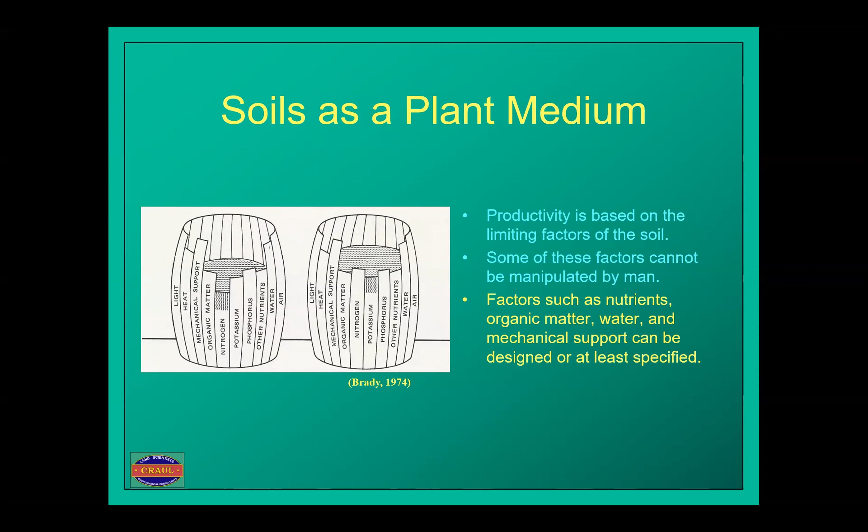The other item we may have too is that most times environmental factors may or may not be able to be changed. Now we can adjust them here and there, but they have a tendency to be something we've got to live with. It's like we can't really mess with Mother Nature very much.

So basically, if you're looking at the standard soils requirements for decent plant growth, you need to have some oxygen, a decent amount of pore space. Your bulk density needs to be under certain levels for clays and a little bit higher for sands. Generally, that works out to be about 1.5 grams per cubic centimeter for clays and about 1.75 grams per cubic centimeter for sands. That changes also with the particle size distribution of those sands as well.

So if you can get some penetration resistance and actually get some stuff to move, it kind of equates to roots elongating through the soil.

Then we have our soil pH, water content, cation exchange capacity, soil organic matter content in the surface. And I like to use soil organic matter content because that's typically the stuff that's derived from detritus and is gobbled up by our soil biology.

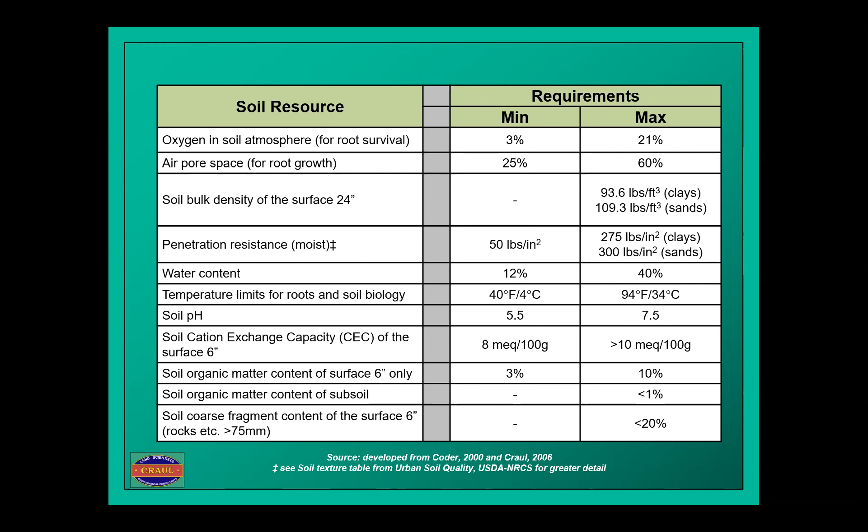So if we deal with our basic soils, there's multiple ways of handling soils, either using in situ soils or design soils. But we have soil density limitations that are sort of cut in stone, so to speak. So therefore, if you're a sand or a very coarse sand or loamy sand, your bulk density that really restricts root growth is about 1.8 grams per cubic centimeter, which works out to be about 112 pounds per cubic foot.

If you get into the stuff we'd typically like to use, loams and silt loams, the good stuff that most highly productive agricultural soils are made of, their bulk densities are actually quite a bit lower before they start reducing root growth. That's typically about 1.7, but you'll see some restricted root growth at about 1.6. Then if you're down into the sandy clays, silty clays, and fine sandy loams, that threshold is much, much lower.

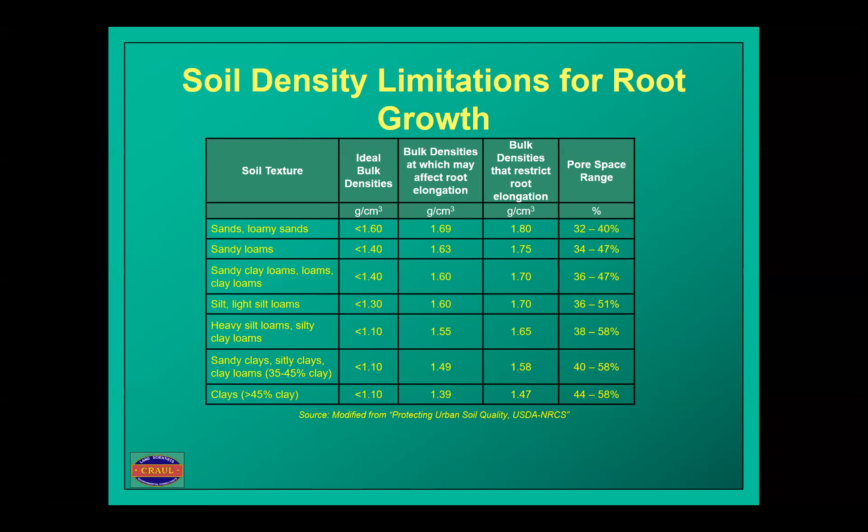If you look at it this way, typically we have an idealized bulk density of any soil texture where you have about 25% water, 25% air, about 5% organic matter, and the rest is mineral. That equates to basically a bulk density of about 1.33 grams per cubic centimeter.

If you get a well-graded soil at peak bulk density, at optimum moisture content, your bulk density kicks up to about 1.96 grams per cubic centimeter, or over 122 pounds per cubic foot dry. Roots cannot go through this type of material, it's just too dense. If you have a poorly graded soil at peak density, it becomes self-supporting, and even though you can really compact it, there's still an awful lot of air space left in it. So your maximum bulk density is about 1.7, or about 106 pounds per cubic foot.

This all comes down to the particle size distribution chart, because unlike soil texture, which is just a reading of the fine earth fraction of soils - the sand, silt, and clay - and does not include anything larger than 2 millimeters, only what's less than 2 millimeters, a particle size distribution chart requires looking at the whole soil, including gravels.

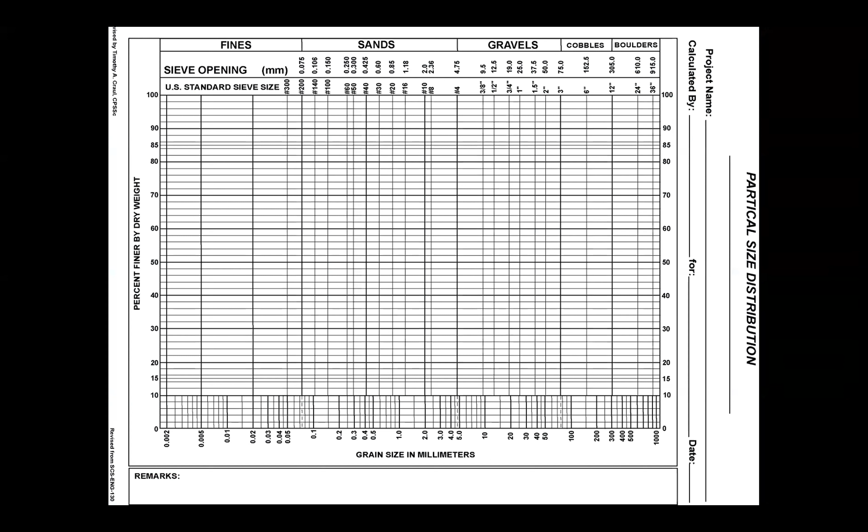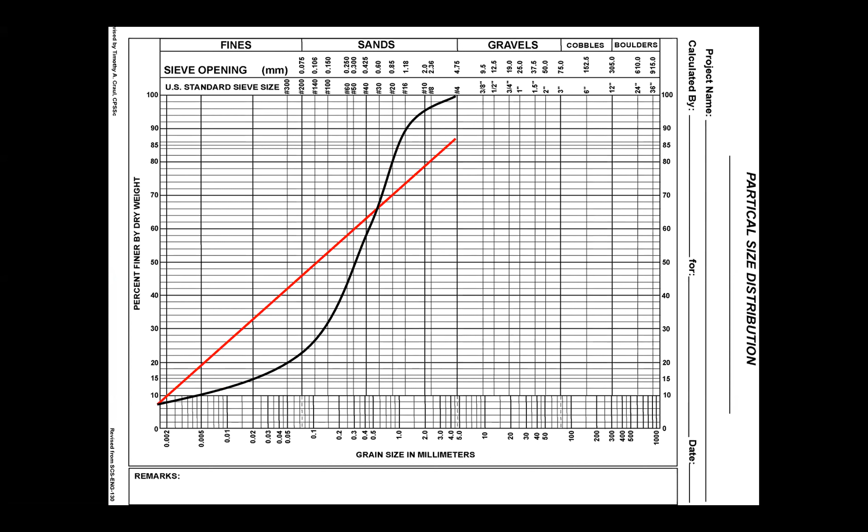If you look here, the first line we have across - the closer we get to a 45-degree angle on this chart, the more susceptible this soil is to compaction. So what we would try to do is find a soil that's poorly graded, which looks more like a sinus curve. In that vein, you have well-graded versus poorly graded soils leading to different results dealing with compaction. The poorly graded will have a greater chance of resisting compaction, where the well-graded would not.

Lo and behold, both these soils that you see on these curves are rated as a sandy loam. So if you look at this, they're both sandy loams, but they react very differently to pressure.

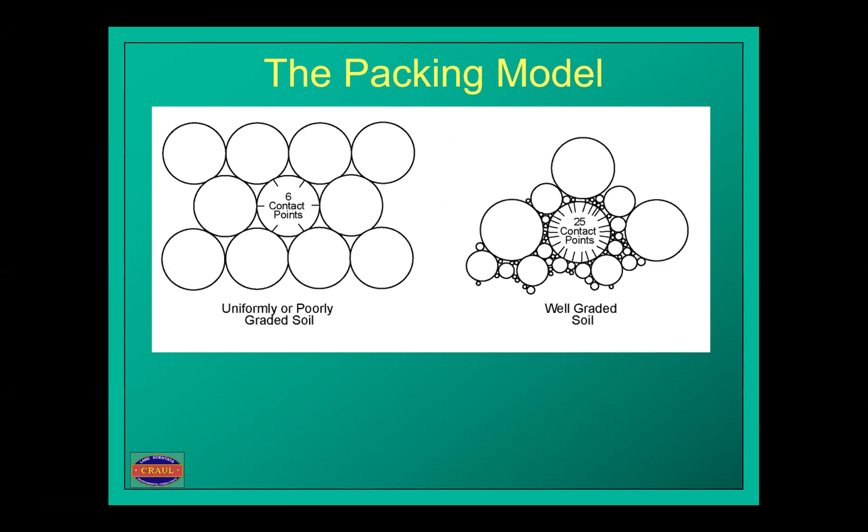If you look at it this way, in a standard packing model, your uniformly sorted or graded soils are basically about the number of contact points you get between your different particles. The higher the contact points, the more well-graded the soil becomes, and the more easily it gets compacted, just because you can fill in the little bits.

Therefore, not all soil textures are created equally.

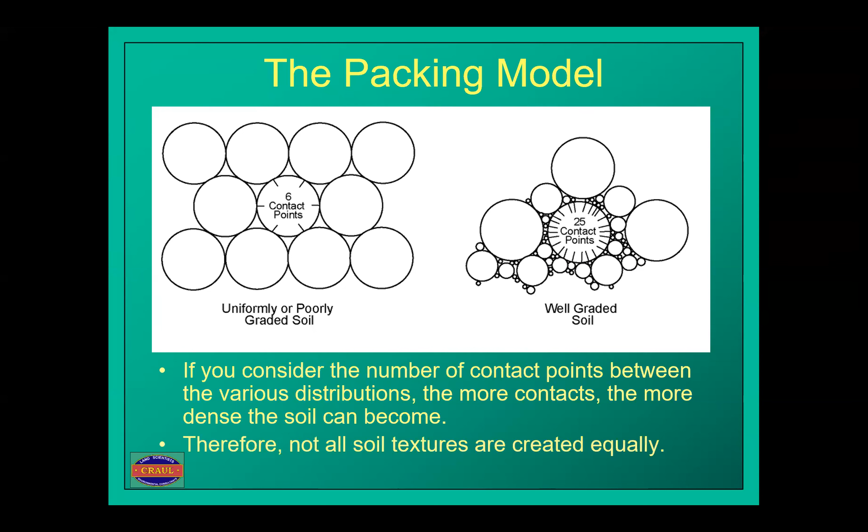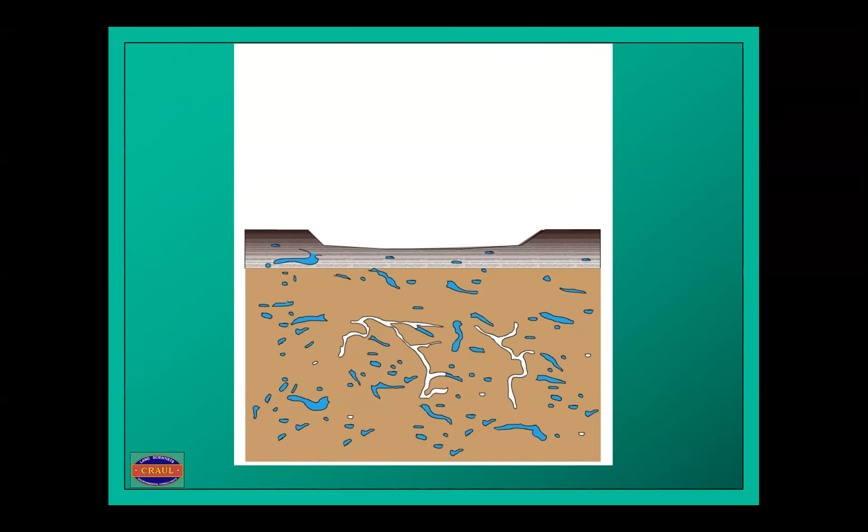Here's actually a CT scan of what I just talked about.

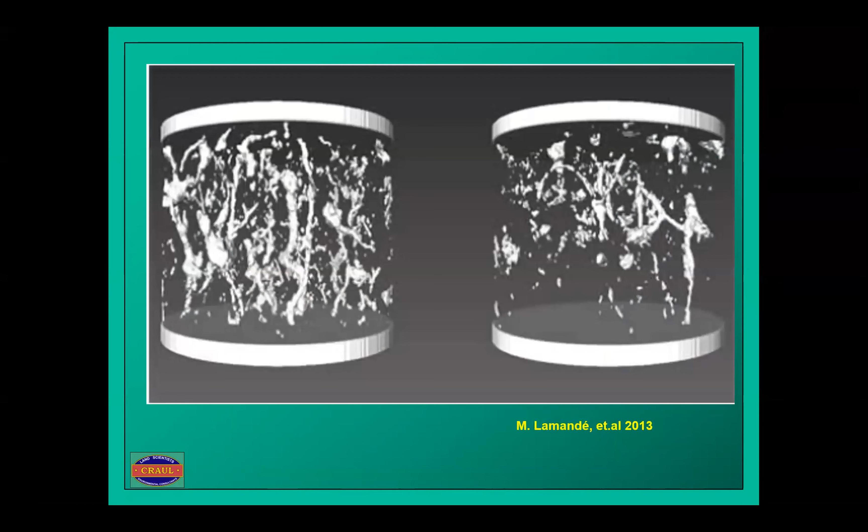If you cut down to the bottom part of these things - Jim Urban, who's speaking next week, found that basically 1,200 cubic feet is optimal for individual tree rooting volumes, according to some studies he did. He found that anywhere between 600 and 1,200 cubic feet rooting volume is typical for surviving urban trees. Of course, the differences then become tree species, environment, and soil properties.

Now, in my design scopes, I typically use an absolute minimum of 600 cubic feet per tree if you have a common rooting volume - meaning a linear trench where you're sticking a bunch of trees in it - and 800 cubic feet for individual tree plantings. This is the absolute minimum. I always ask for more. I pray, I beg, I get on my hands and knees and cry to the gods: give us, please, more rooting volume.

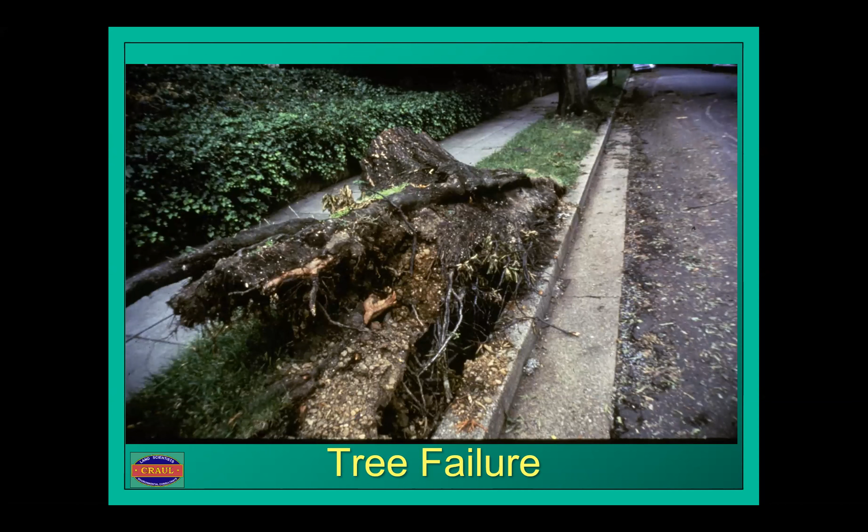So it's always better to have more rooting volume. If you don't have the rooting volume, typically what happens is you get tree failure. About 90% of the time, most trees fail due to rooting volume restrictions. But every once in a while, you get an infrastructure failure, where the tree actually decides it doesn't like being confined and goes where it wants to. So in this particular case, we have structure failure.

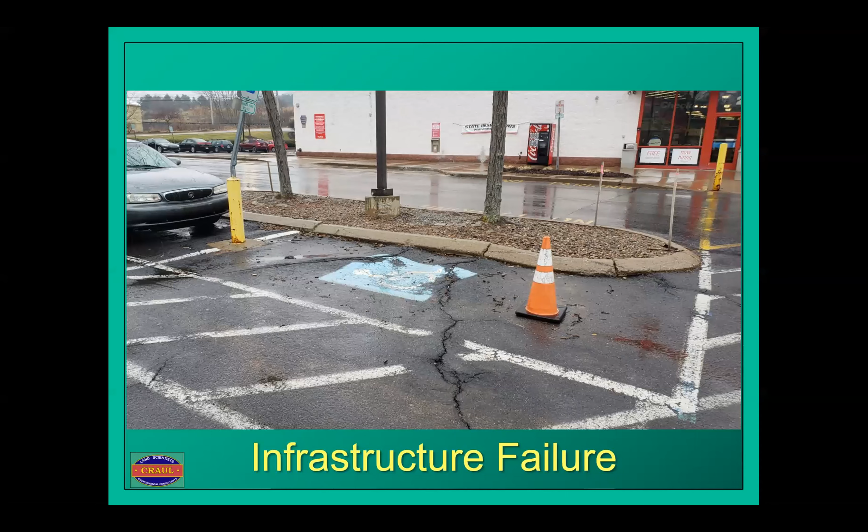Okay, now with all this soils data basically in the back of your mind, the tools and proper use are basically: try not to use a wrench as a hammer. It might work, but you may hurt your fingers.

So the tools, number one, be use of natural reference soils, i.e. soils that are in situ or something close by, screen topsoil from a construction site across town, soils that are currently on site that have been stored to one side, basically natural soils. Then we have structurally supported sidewalks and drives, the Cornell structured soil, sand-based structured soil. Now, all these different things are tools for your toolbox to pull out of, but they need to be used in the proper way. They can't just be thrown at everything and hope it'll stick.

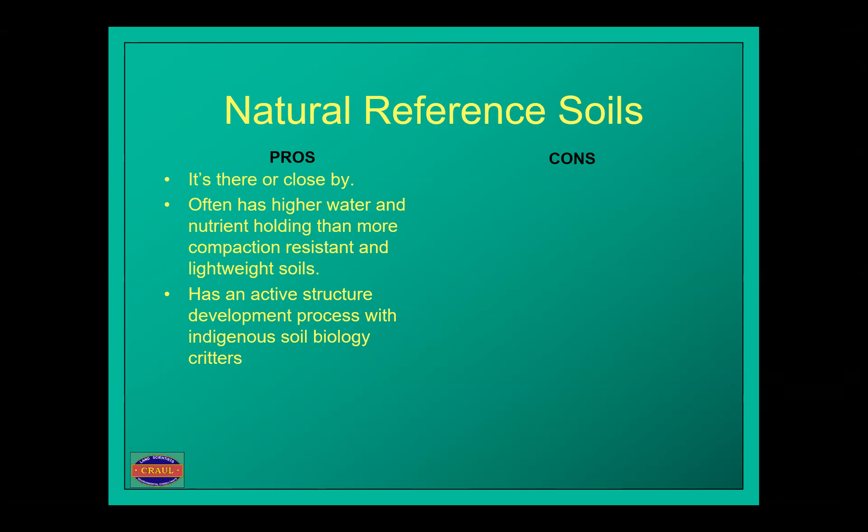So if we take a look at natural reference soils, the pros are they're usually close by. They typically have higher water and nutrient holding content than more compaction resistant or lightweight soils. They usually have an active structure development process with indigenous soil biology critters, so that they're already inoculated with the local good stuff. Generally, they have a higher productivity per unit unless they're degraded.

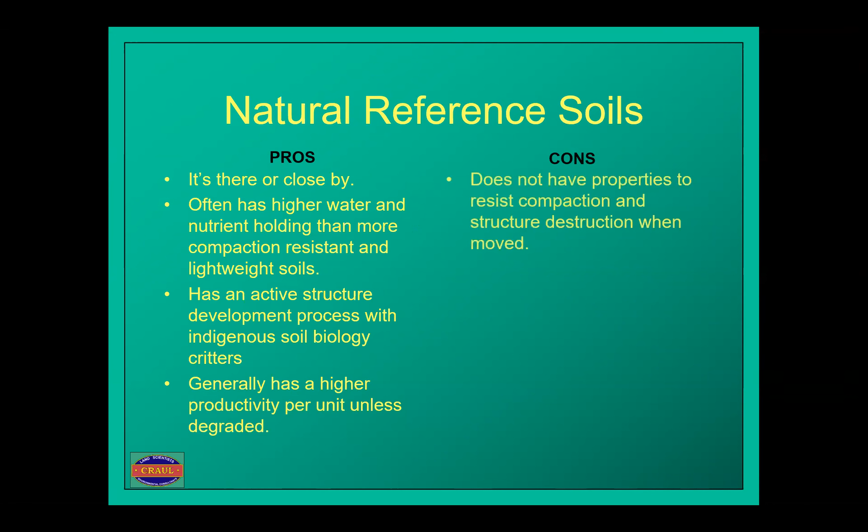The cons are they don't have the properties to resist the compaction or structure destruction when they're moved. In other words, they're also not homogeneous and they're easily degraded. They require a narrow moisture content range to work, and they're usually slow to dry out, which often delays installation.

So how many people on this call can raise their hands showing that the landscape was rushed to be put in, and they're installing it whether it's raining or not. If you have that problem, natural reference soils with a finer texture are probably not the best way to go. They may not be suitable to withstand the urban environment, with lots of people stomping across it, lots of events, heavy prescribed uses like concerts. So it would actually put a hurt on those soil properties, causing compaction, leading to remediation more times than not.

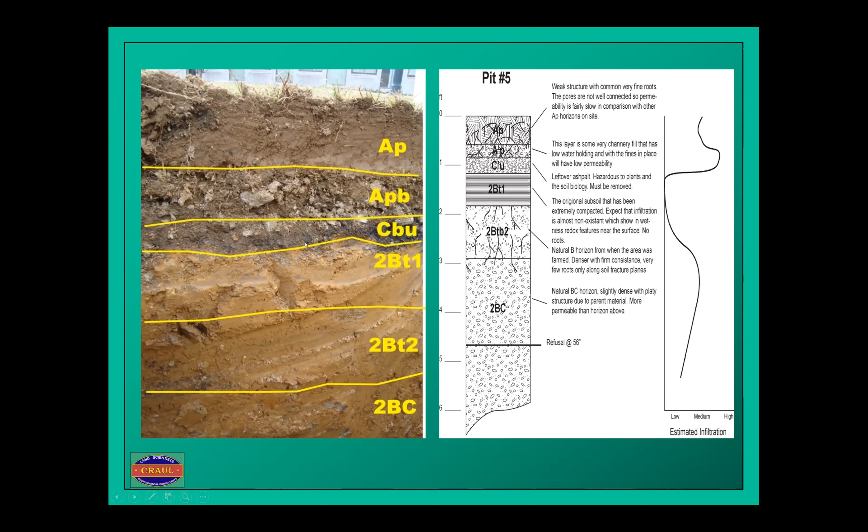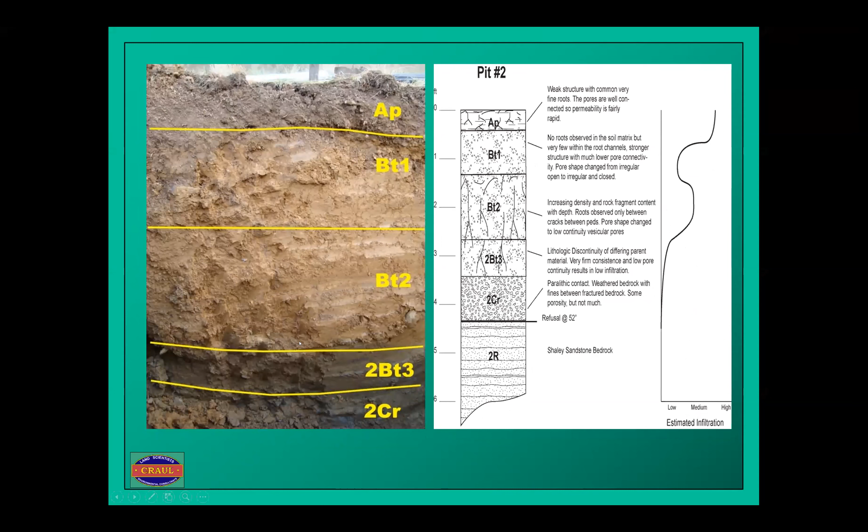If we take a look at structurally supported pavement, this is basically where we design some sort of mechanical means of supporting the pavement. This is either through Silva Cells, soil cells, or suspended pavements on some kind of cantilevered system, or piers with a matrix of stuff. The support of the pavement is separate from the planting soil structure. This allows you to use a more delicate planting soil that can hold more nutrients and water, reducing your water needs and increasing the productivity of your trees within that.

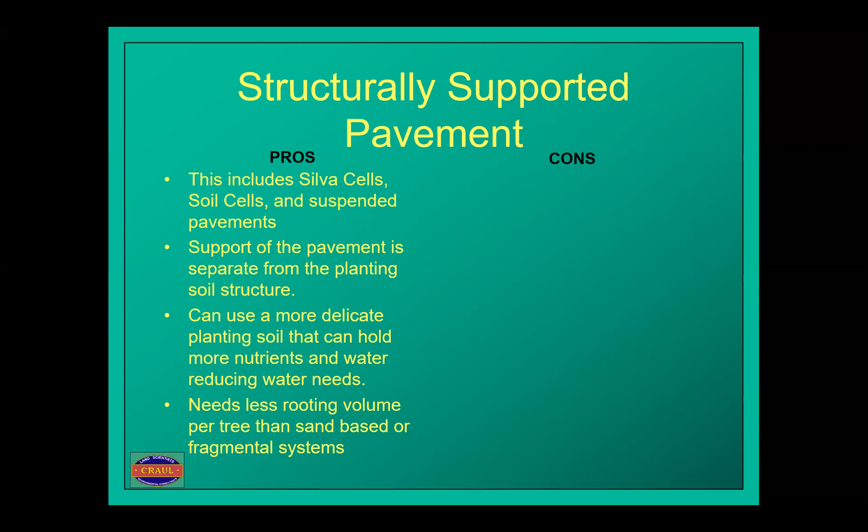It needs less rooting volume per tree than a sand-based or fragmental system because you are providing more water holding and more nutrient holding for those trees. However, these need to be used in specific conditions, or else some other things start to happen. It's pretty expensive per square foot to actually do this kind of construction.

Cell systems typically have difficulty fitting around underground utilities if the underground utilities are going kitty-corner to the layout of the cells. The other thing that also happens in high vibratory environments, i.e. next to heavily trafficked roads and streets where triaxles and heavy equipment are going, that vibration shoots out probably a good 100 feet from the drive itself that we need to adjust for.

With that high vibratory environment causing shaking of the soil, if you have a soil dealing strictly with structure at optimum moisture content, guess what happens to the macropores that are in there? They collapse, leading to subsidence and other issues, so you have a gap between your support and your pavement, which may not be able to support anything that drives on it.

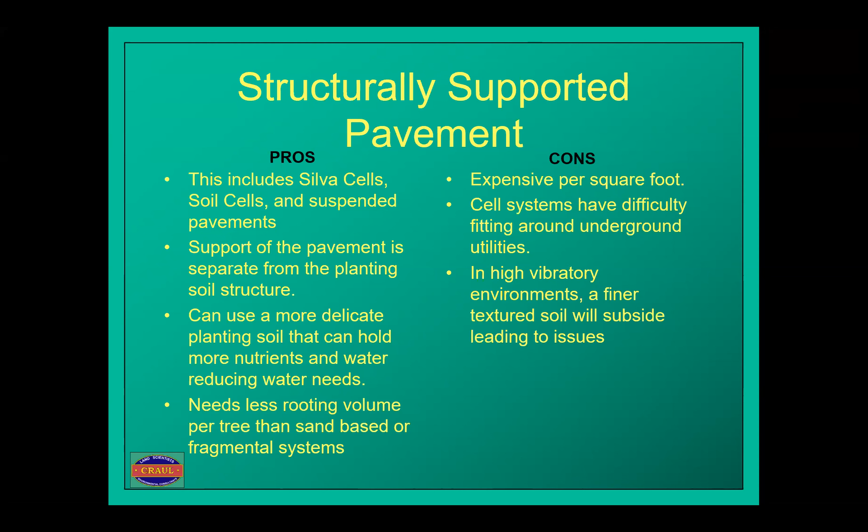This is actually a mechanical support system. This was used at Euclid Avenue in Cleveland, designed by Sasaki and Associates, a project I worked on. We put a sand-based soil in here because it was right along Euclid Avenue, a heavily trafficked area, with a tram that went down the middle of it. So we did use a sand-based type soil, but we did not have to compact it to 95% of standard Proctor. This was laid in at about 90%, just to ensure we filled all the spaces and didn't get too much subsidence. I haven't been back to check it, but I believe there's probably some subsidence in here, though maybe less than an inch.

Here's a Silva Cell section. We're doing this down in Philadelphia. The Silva Cells are actually placed over structure, above a parking garage. So this cantilevered concrete system is going to be subjected to some vibrations, and we were considerably worried about settlement of this material. So in this particular case, we're going with a soil that is resistant to compaction.

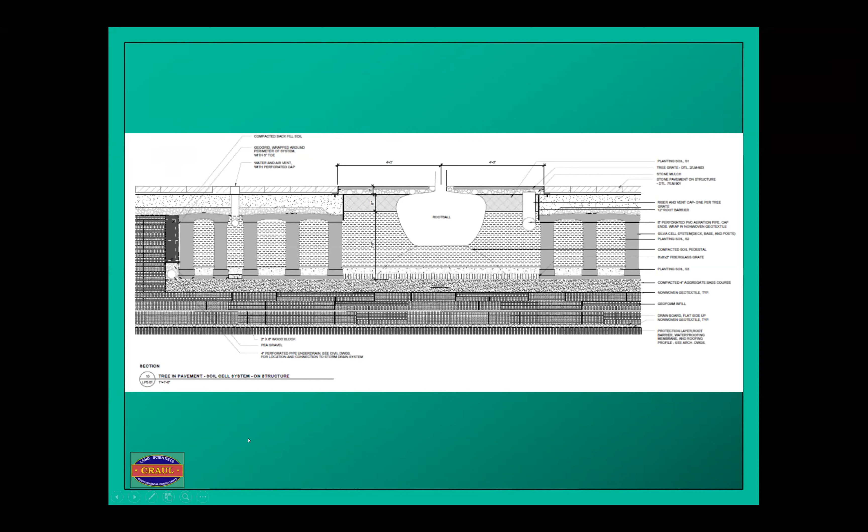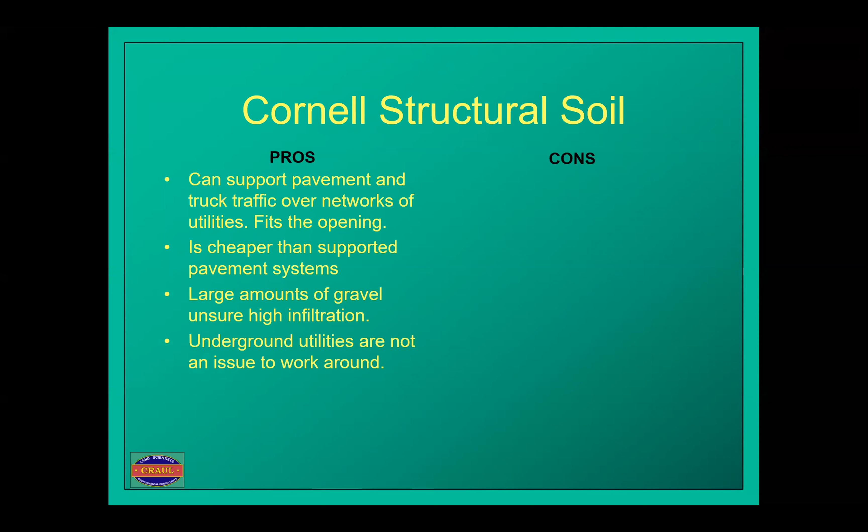The Cornell structural soil can support the pavement and truck traffic over networks of utilities, and it basically fits the opening. It's cheaper than supported pavement systems because we don't have to build anything, we just fill a hole. Large amounts of gravel ensure high infiltration. The underground utilities are not an issue to work around because you can fill in around them. However, the rigid matrix does not allow structurally sound framework roots.

The gravel used can also be detrimental to soil chemistry. If you use, say, a limestone or some kind of gravel that has a generally high pH, that could increase the pH much more within the system itself, and we'd have to offset it. The other possibility is you could get a gravel in there that's actually expanding gravel—once you add water to it, it has a tendency to lift. So you have to be careful about what gravel you use there.

The addition of hydrogels can also lead to a portion of moisture being retained and unavailable to plants. I've seen some newer hydrogels that have a tendency not to do that, but I'm not really sure which ones are where, and I'd be a little careful about putting too much hydrogel in a system.

Lastly, according to the Cornell recommendations, you need to find a silty clay loam to use for the mix, and it's very difficult to find a good upland silty clay loam in a lot of places. So that may be detrimental. You may have to go with something coarser textured anyway.

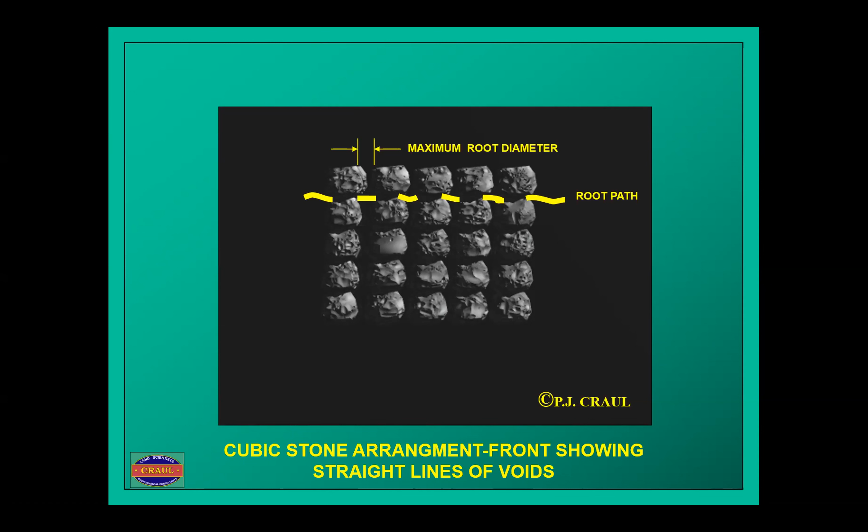The main reason I was talking about this is that the stone itself, if it falls into a cubic stone arrangement, you can actually get a straight line void so that roots can go straight through it. But typically that doesn't usually happen. You usually get a tetrahedral packing, which causes the root path to undulate rather than go in a straight line.

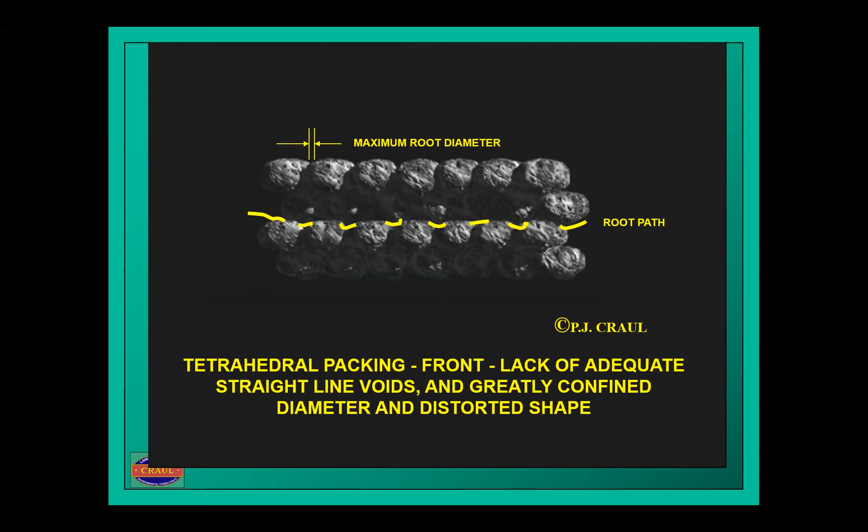This pertains to the framework roots themselves. Framework roots develop their own cross sections to be able to structurally support the tree. I believe Cornell looks at roots of this size, which I like to call slinky roots. For fine root hairs and small roots, this system is not a detriment. But for framework roots close to the tree that have to be structurally sound to support the tree crown, you need a clear way for those roots to generate their structural soundness, and a rigid stone matrix doesn't allow that.

If I'm correct, I believe Cornell now states that this stuff has to be used out away from the main tree root, away from the tree trunk itself. I don't know the definite spec, I'd have to look it up again, but that's the last I read.

Now, I wouldn't rely on these numbers too much because the Saxton and Rawls equations were generated by fitting curves around data, and a majority of that data was in the center portion of the texture triangle. So as you get towards the outside edges of the texture triangle, the fitting equations have a tendency to go kittywampus on us. We need more data to plug in there to confirm that's actually happening or not, but at least it makes logical sense.

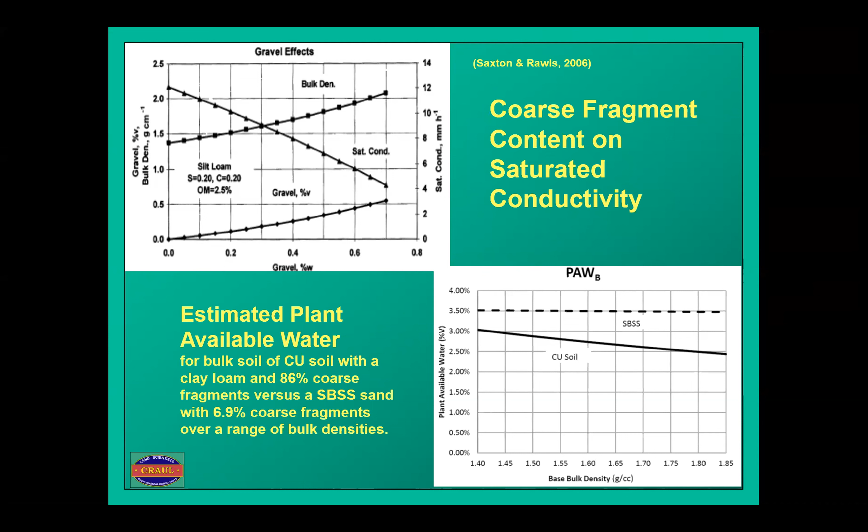So for sand-based structural soils, the pros: it can support pavement just like the Cornell structured soil, fits the opening. It's cheaper than supported pavement systems and the Cornell system because we don't have to mix up anything special, we just find some good sand someplace, although that sand needs to be relatively good. The materials are more readily available, and it resists vibratory compaction from adjacent traffic.

It can also act as a green infrastructure system. If we have something that infiltrates a lot of water, we can run a lot of water through it, which would then filter that water. By the time it gets to the bottom, we can say we've filtered it and it has helped with the quality of that water going out.

The cons are low moisture and nutrient holding capacity. These sand-based structural soils are droughty, and they also have low nutrient holding capacity. But we can tweak this with organic matter content, addition of biochar, and a few other things.

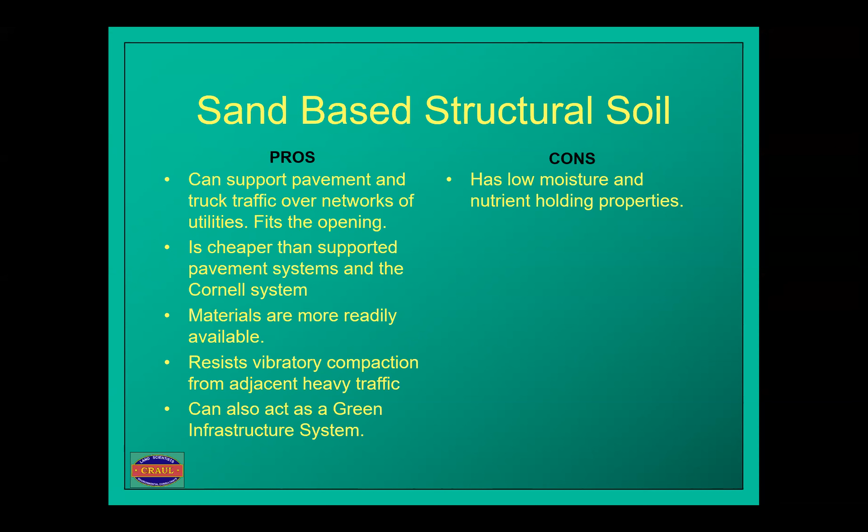The particle size distribution of sand required to obtain compaction resistance is fairly tight, and not all sands work well here. If we get a sand with a high amount of calcium carbonate in it, it will tend to gel and actually cement the sand particles together, which might as well be almost concrete anyway. Freshly mined natural sand can also cause this cementing, and it has a propensity for high pH content.

Until we get some nice rainfall events running through the system, that pH is going to stay high. Now, with the pavement system around it, if we have concrete, there's a problem of runoff from the concrete being very high in pH, and we can get soils underneath concrete sidewalks to be fairly high as well. That's true with all systems here.

The thing with sand-based structural soils is that since it's a coarser material, it has a tendency to flush more readily than a soil using a finer texture.

Good medium sand is also difficult to find in areas that are supplying for fracking. Try to find decent sand in Chicago - most of that stuff has been shipped out west to North Dakota for fracking. It's hard to find decent, good medium sand in Chicago.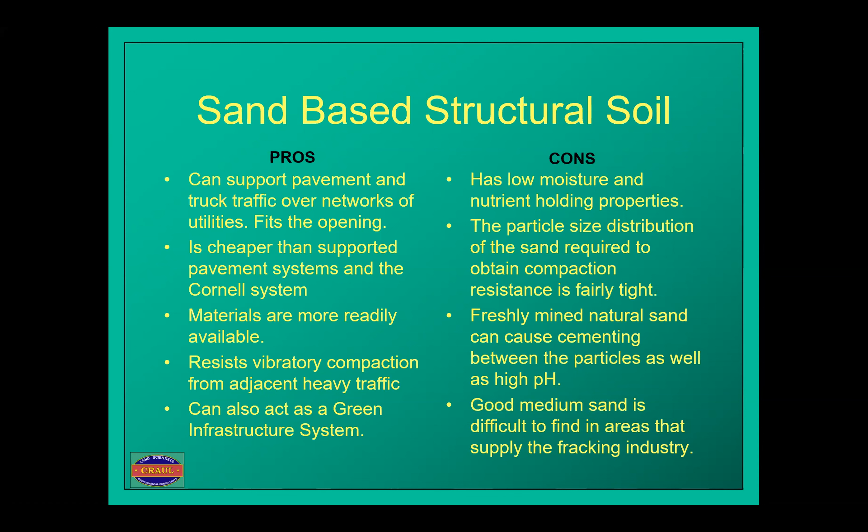Okay, looking at the Proctor compaction, if you take a look at A and B here, they are well-graded particle size distributions, and their Proctor densities are very high. Notice that the dry density in grams per cubic centimeter is well above anything that a root could actually penetrate.

D and C are poorly graded particle sizes with significant amounts of sand-sized particles. If you look at the moisture contents in these red bars, it doesn't take a lot of moisture for those finer-textured A and B soils to meet their optimum compaction, whereas the moisture content for the sands is actually a lot higher. So therefore, in reaching optimum density, we're allowed a little more wiggle room during the installation process.

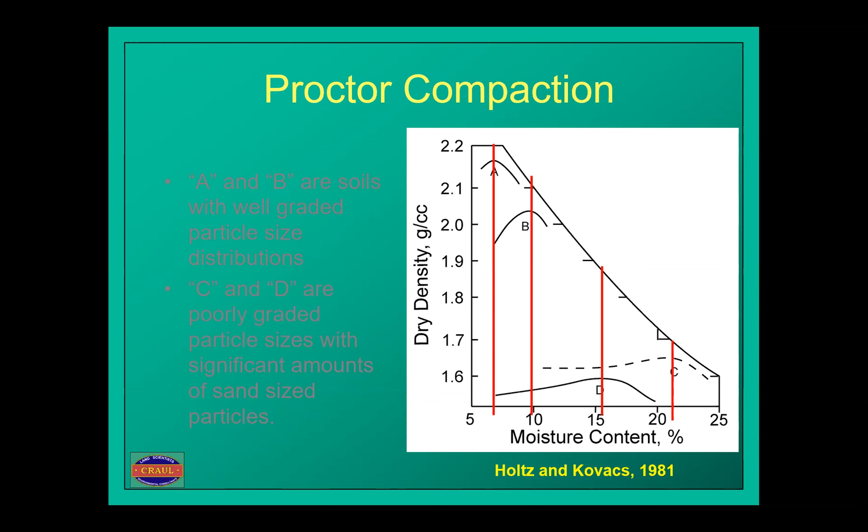Now, the other thing we can also deal with is we'd like to see a system of pervious paving in between the trees to allow for flow into them to offset the droughtiness. The other thing it also does is if there's any kind of detritus on the sidewalk, fine organics or whatever, that will also get into the system and feed the roots.

But it also has contaminants that would possibly cause problems for those as well. Hopefully we can get a flushing from that system to make sure it doesn't overflow and override the trees to the point where we get failure.

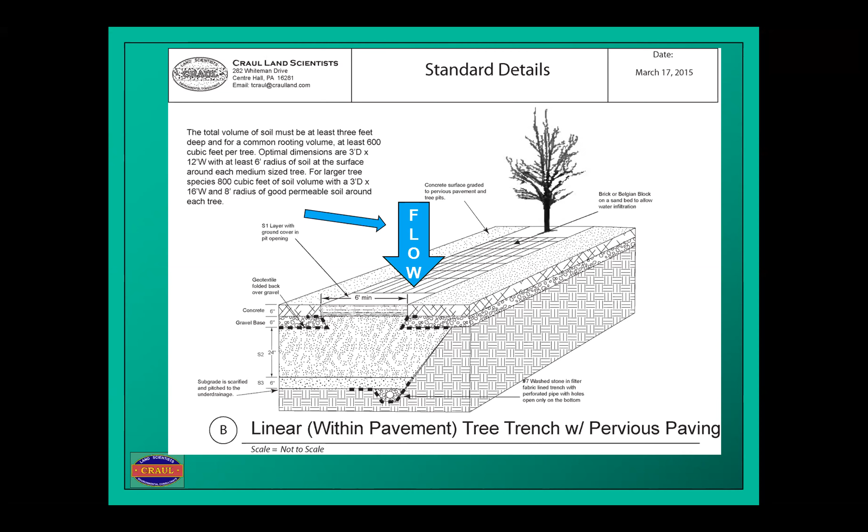Okay, this will give you an idea of what it looks like during installation. As soon as I see an installation of the Silva Cells, I'll have photos of that. Right now, at Shoemaker Green at University of Pennsylvania, this is the sand-based soils going in. This is the gravel being applied on top of the geotextile, before and after the compaction is done. These are the trees being put in, and the geotextile is pulled back away from those trees. They put gravel back in, and finally, this is the pervious paving going in.

And finally, the last thing I want to touch on: if we ignore the proper use of soils and the proper locations for using the tools in our toolbox, we could have some failure issues. So don't take the idea that we can save 700 dollars by not taking soil tests.

Okay, that's everything that I have right now.

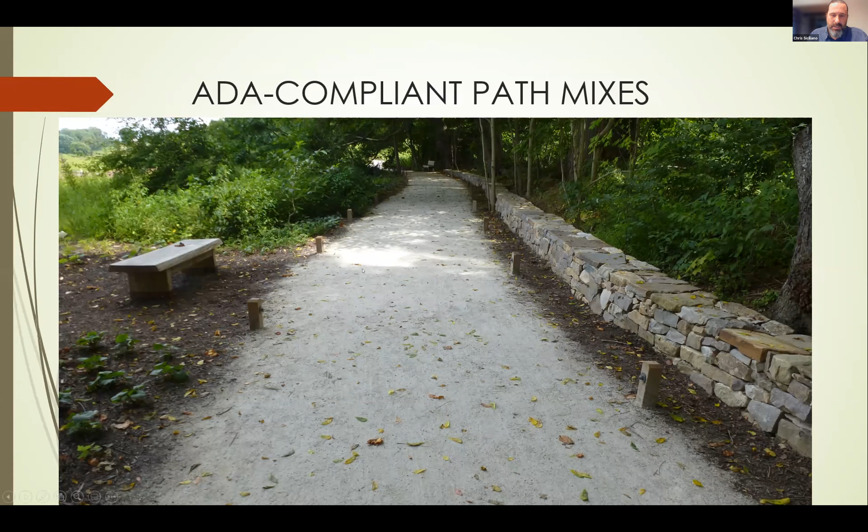Our custom blending—just to kind of give you an idea of what we were doing—this was a project that was out in Louisville, Kentucky. They had a washout, I believe, back in 2017. The river flooded and took out a huge amount of this.

Really, this is just a public space. It's an art scene. They did a wonderful job. If you haven't been there, it's worth stopping out, turning the areas around the highway and under the highway into basically parks, festivals, things like that.

And so we had this material get driven on quite often. We had to do color match. There were certainly a lot of blenders that were a lot closer, but we had the experience. And I think at the end of the day, everybody was really happy with what ended up happening.

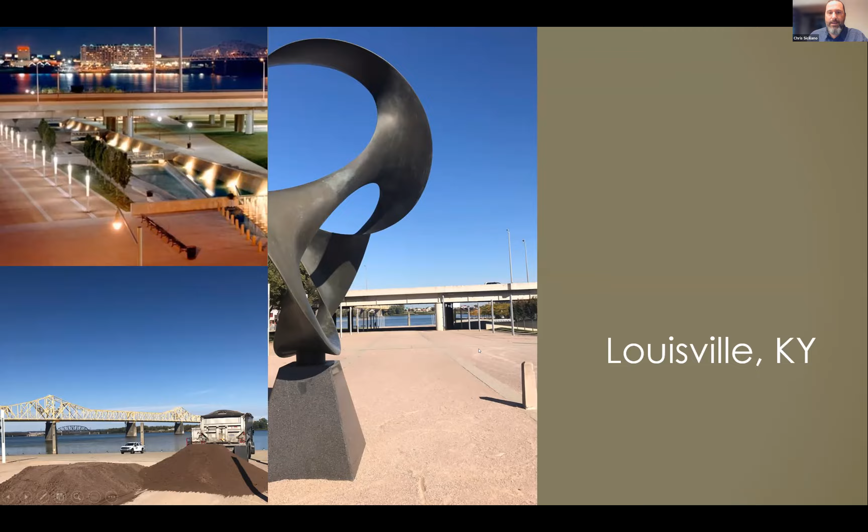Here we are in DC, the National Mall. These are the walking paths on the mall. This was a 5-component blend. This even kind of pushed our limits a bit—being able to keep this job on target and moving, but to keep it consistent.

So this is a material where you really want to have a very good qualified blender, because you've got to have something on this scale where it's going to be—I have to match up the soils from day 1 to day 30 as it's wrapping around. So when these guys come back 3 weeks later and you're butting up, it's got to be a spot-on match.

We also did the soils as well on the mall. The first half, this half that you're looking at, was 2012. The back half was 2016. And this was just a great project to just throw in.

Facescape is an artist's rendition—it's what America looks like. It's kind of the average. They took about, I think it was like 30 photographs and overlapped them.

And we were really just brought in—they were kind of at a standstill, and we were brought in as a consultant on it just to help. It's 6 acres. And so anyway, the picture on the left was under construction. And if you actually look under the lip, there's 2 people there with fluorescent vests on, just to give you a sense of size.

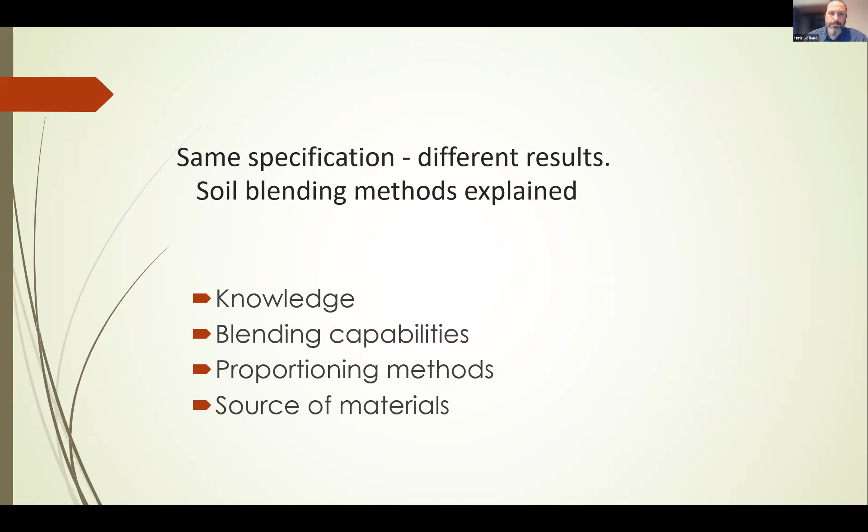So this is a loader, as we all know. The most common blending method is pad blending, either on asphalt or concrete. Typically what they do is have a formula which tells the driver to pick 2 scoops of that, half a scoop of that, another scoop of that, put it into a pile, scoop it, lift it, drop it, and back drag it out and do it. Now I want to be clear, this can work—it's a reasonable way of doing things. I don't expect people to have invested the way we did, and it can work, but you can also see this as an opportunity for human error.

If a project is being rushed, there's moisture content—yes, there are scales on these things, but there's also moisture content differences, so things are going to weigh different weights on different days. This just could be a potential issue. What you're going to get from that is inaccurate proportioning, inconsistent mixing, especially if it's wet. It can be prone to contamination, though that doesn't seem to be as big an issue, but it's something to be aware of. You get inconsistent results—if you're testing this, and it's not being mixed or proportioned correctly, you could get inconsistent results from it—and it's time consuming.

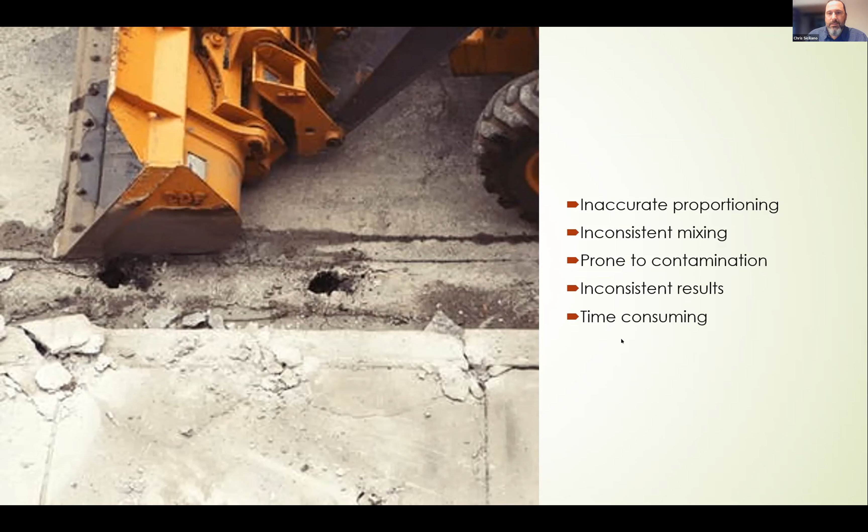Okay, this is our blending plant—kind of the opposite end of the spectrum. I'm going to walk you through it. First, we're going to focus on the proportioning system—that's all this thing does is proportion, like we're mixing paint. On the left, you'll see we've got the loader, and that's most of the materials—it's going to be aggregates, compost, sand. Any of those things go into this blending plant.

The super sack material also goes in, and that's going to be anything like materials, organics being shipped from farther away, like rice hulls, something like that. It could be vermiculite, perlite, something that's really light and could blow away, and it's usually to protect from the weather. And then anything else that they let me put in the bins there.

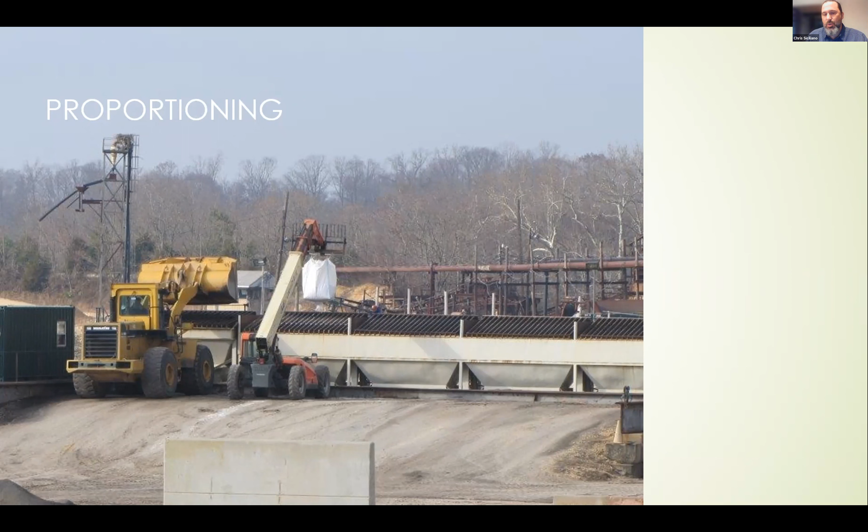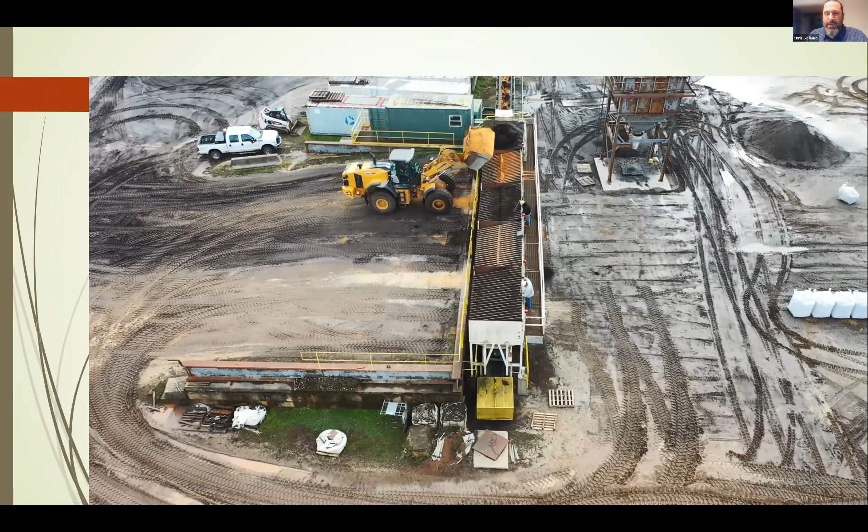On the left, the picture is just showing you go to the blending plant, and then on the right it comes out—hopefully you can see this. So here we are loading it. Happened to be a rainy day, but that's the day we got the guy with the drone. Material, consistent pattern all the way up, down through the blending plant, shoots off to the right there, and as you look, every bit of it is consistent coming out.

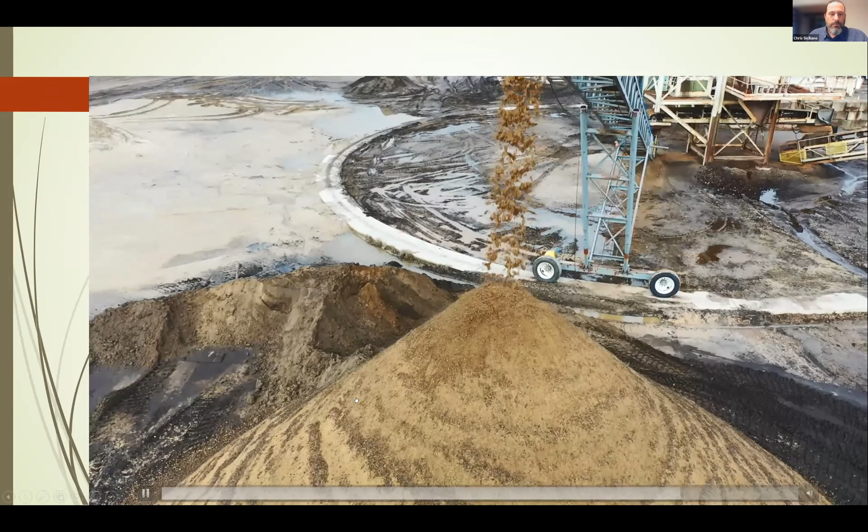Okay, so some of the results of poorly designed soil.

Short term is mostly focused on, a lot of this is based on green roof materials, it's 90% of what we send up to New York. So the short term, sedum mostly are going to be affected by this. Other plants are probably going to be happier with it, higher organics and a higher moisture content, but a higher

organic mix is going to have a greater level of compaction. Drives up the cost because you need to bring in more material. It would be a cubic yard, but then if it's going to compact 20%, you need to order extra.

You get stunted growth, especially with sedum. They don't want their feet wet, and it can delay the root establishment. And so that just leads to higher maintenance costs. You're getting more weed seed establishing. But that's what happens if it's sedum.

Now here we're looking at this, the long term is a loss of volume, and this is really our concern. Once you lose volume, you do get some root exposure. That's not the end of the world, but it's the diminished permeability. That's really when your performance is really going to start to suffer.

So all materials are made up of organic and mineral. And when that organic breaks down, the organic is taken up, but the mineral portion stays behind in the forms of sand, silts, and clays and clogs up void spaces. And so where you had a very well draining system 2 years ago, you no longer do. And once the fines are in, you can't remove the fines. So it's one of those things where you get what you pay for.

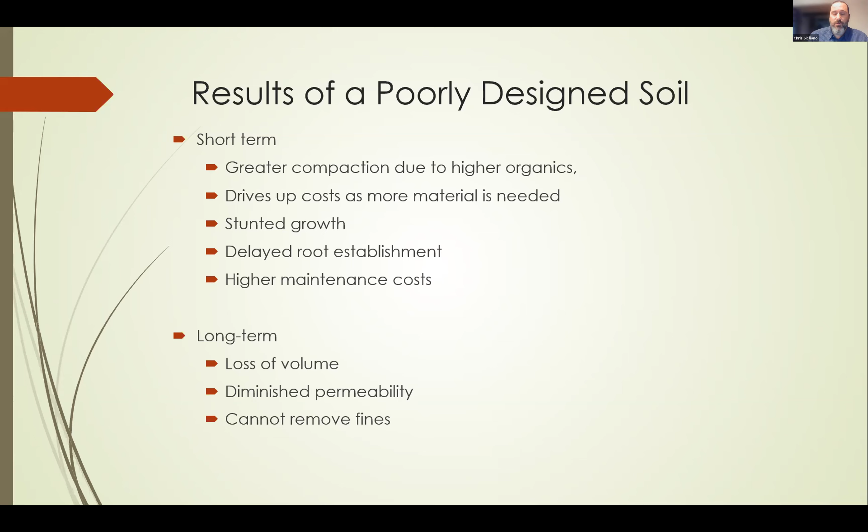So I've renamed this one, I don't know how many times. It's not really cause for concern, it's just things to consider as you're going through and some things to pay attention to.

Test data, and I am pretty serious about this one. We test every 6 months. Now that said, we're probably at 6 months right now, we don't have anything back, so we're at 7 months, but certainly nothing more than like a year. People should be monitoring at least that long. I've seen all sorts of stuff be submitted where it's been a lot less or a lot longer than that.

Now, we do so much custom blending that I have dozens of formulas. I can't possibly send them every year, but if there was something you were interested in, I could bring something up and we could retest.

Ignore the marketing and focus on the testing. There are some great designs, there's great concepts, I don't know that I agree with all of the end results of them. It's just kind of packaging. Focus on the test results.

If there's systems that they're telling you to use and they're telling you all the components, at the same time focus and say, well, should I really have that much organic in a mix? Or should my drain rate really be there? And those are things to consider.

Beneficial reuse and sustainable materials. We definitely use, we have beneficial reuse materials, sustainable materials, we do, if they work. Priority one on any job is, does the material work? Does it fit with the mix? And just because, and we all kind of like those terms, it's always exciting to say that, oh, there's a beneficial reused material in there at 20, 30, 40%. But there's a lot on the market that probably shouldn't be going into a green roof or other mixes.

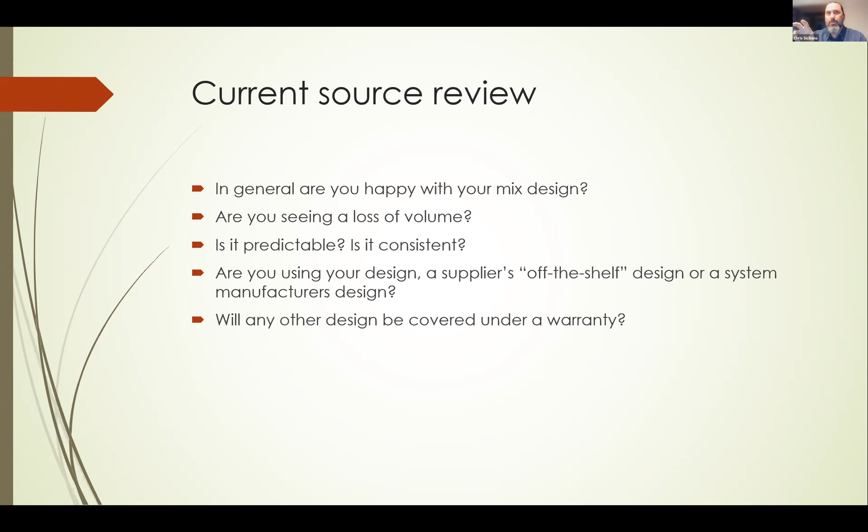Are you using your design? Is it your mix? Is it a supplier's off-the-shelf mix that you're adopting? Or is it a system manufacturer's design? And if it is, is it under warranty? So those are all things to consider. If you're using a whole warranted system, you couldn't swap out the organics without their buy-in.

Our design method boils down to this: we do not write specifications that steer you to Stancills. We write them to raise the profile of the industry, and that's always been very important to us. There are specifications out there where people have asked, we really want to make sure your Sky Garden gets on this project. Well, if it's an or-equal and it's an equal product, there's not a lot we can do about it. We have some basic design principles we've developed over the years, lots of trial and error, lots of testing, and we pretty much stick with those parameters in our designs. So as long as we're sticking within that range on a design, we should be successful. Haven't had problems yet.

Sorry, but the physical and chemical characteristics - when you're talking with your blender about changing things up, they really have to know their physical and chemical characteristics really well, because they're going to overlap and interplay. And unless you have a really good understanding of what the outcomes are, you can have results you're probably not anticipating. So if you wanted to make something lighter weight, and you're going to pull out, or if you wanted to remove some lightweight aggregate, they should be able to tell you the 10 things that are going to happen from that.

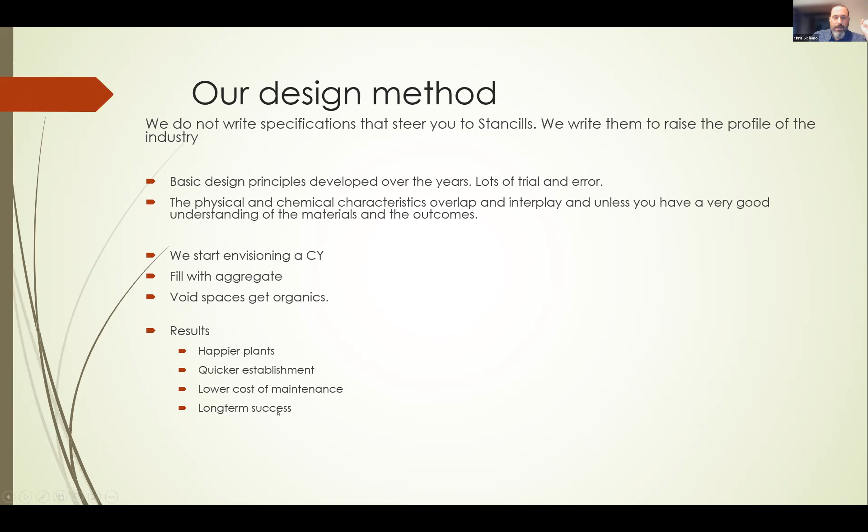So when you're specifying, a couple things to consider. You may have a great compost source, and if so, just check to see what it is and see what their latest testing is. Make sure the pH is where you're looking for it to be.

You could request a minimum amount of aggregates in there. As for the source of aggregates, while they're not all equal, they all have advantages and disadvantages. I don't know that I would specify one or the other. You've got two good sources up in New York, so you should be fine.

Warrantying against a loss or compaction is something we had talked about—guaranteeing that if there was a loss, they would make up for it.

I think accepting the 'or equal' tends to be a big concern a lot of times. I hope that you guys get to work on jobs where you actually do get to enforce the 'or equal.'

You want to be looking at higher pHs, that could be a thing. If it's a lower drainage rate, it's probably only going to get slower as the materials start decomposing and weights change.

Although I just spent a whole time going over the blending systems, I don't recommend specifying specific or eliminating certain blending systems. I think what makes this industry great is that we went through the innovative period and we're more into almost like the economic period right now, of how to make it cheaper. I'd like to get back more to the innovative. I think you can get some people with great, wonderful ideas, and I'd really like them to be out there. I don't expect them to have the equipment and materials that we have to be able to do it, so in order to push it forth, I think it's good just to make sure they're doing a quality job at that.

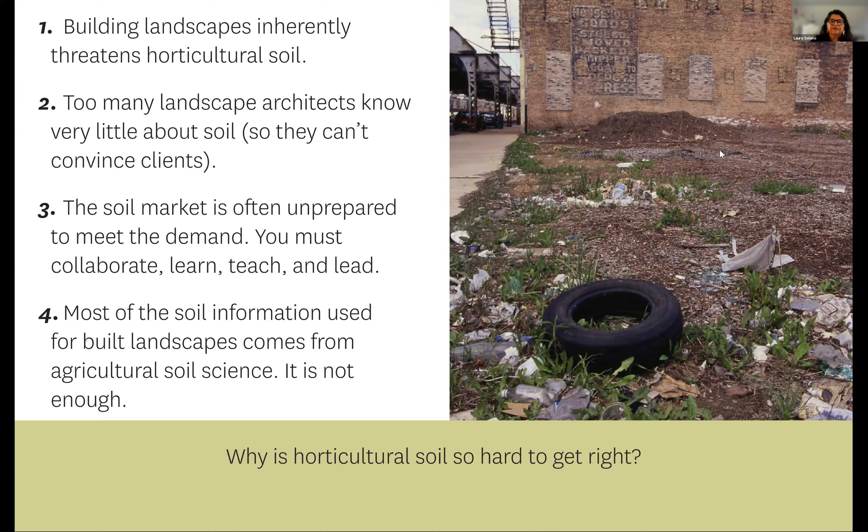So the truth is, anytime you move soil - when you move horticultural soil, and by the way, that's what I call the soil we use on our projects - but when it's disturbed, it's changed, right? And from that moment of disruption, you need to manage it so that it can perform. Because really what you're after in the long run is performance from soil, because it's hooked into so many other things.

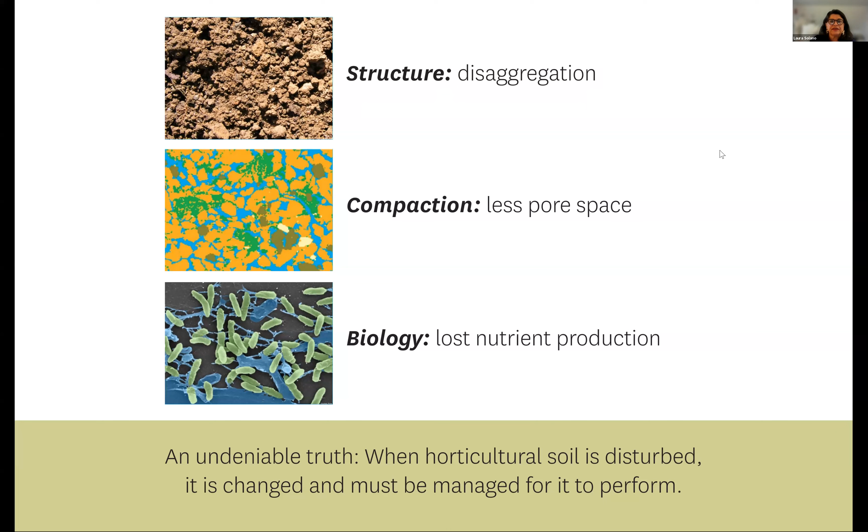Making a landscape is really highly complex and also wildly risky. I mean, think about it - we tear apart the earth and we bring new elements in, we bring new soil in, and we are literally making a mess. So it's our job to manage that mess and make sure that every step of the way you are taking care of the right things. Soil is really the foundation, literally and figuratively, for all landscapes.

And yet making landscapes is a really tough ride for horticultural soil. I'm going to pause here for a moment and bring up a video for you to see. So I'm going to share my screen in just one second. Okay, this might even work.

So this is a video from the George W. Bush Presidential Center, which my firm worked on. The video was created from cameras used on site during construction. Manhattan Construction basically put this together at the end to show the progress. But while it's meant to show the whole project, I think it underlines exactly what's happening with soil and why it's so important to take care of it. So let me warn you, there's some really corny music in here - I'm not responsible for that, but there are a lot of things in this video that I am responsible for.

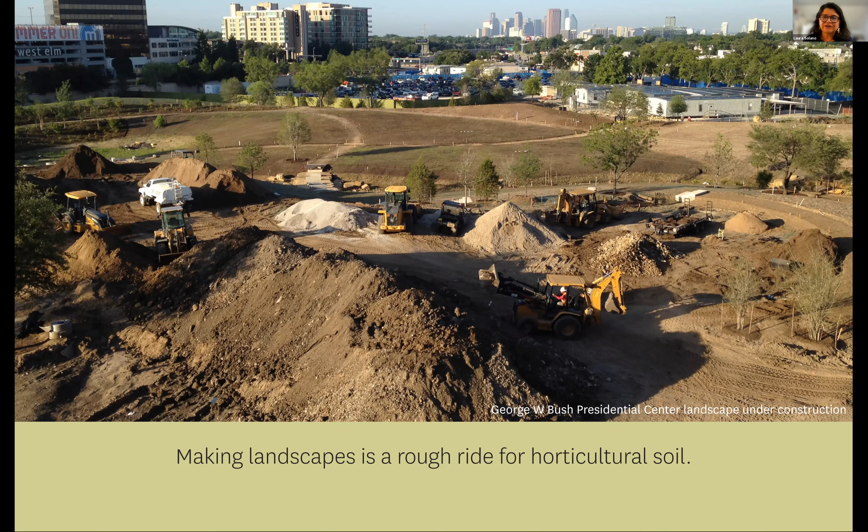So until I saw that, of course I've always known it's a lot of work and effort. But when you see several years of construction squished into two minutes, it's really just startling how much work has to go into building landscapes and how raw they are. And I always cringe a little at the end of that video - while I think the landscape is gorgeous, I know it's kind of the way new parents look at their newborn child as being perfect when they're a little squished and not particularly attractive. So things get better on projects.

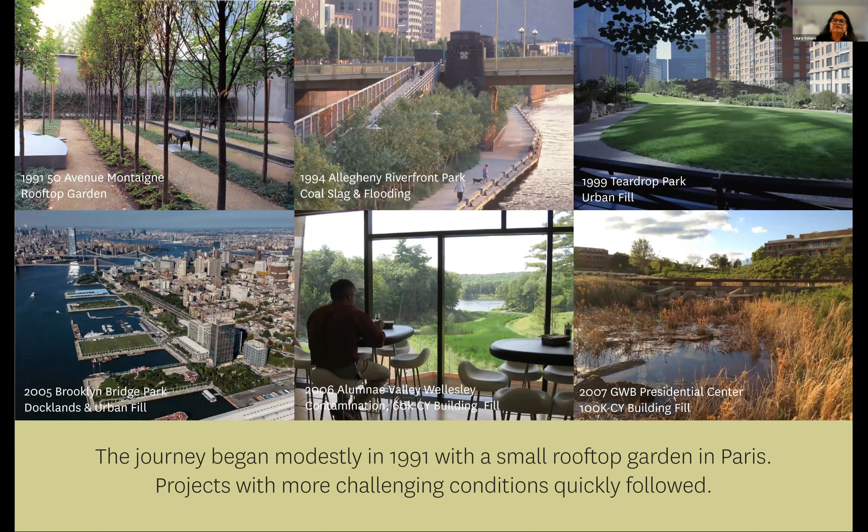So just take a few slides to talk about how did MVVA get here, how did we start using soil? Well, it was a modest and humble beginning. It started at a project called 50 Avenue Montaigne, which was a rooftop garden in Paris. It sounds snazzy, but it was just such a tiny little project. And because it was a rooftop, we needed to get some expertise on how to do that work and how to make sure the plants survived. And so I was lucky.

I got to be schooled at the knee of Phil Craul, who taught me so much about soil science. He and Tim, of course, have taught me a ton over the years. And so that's sort of how our relationship began. I asked a million dumb questions across time, and still do, and people still continue to answer them. So in each of these slides, I've given you a sense of what was there before we started building - it's one of the main things you need to look at when you start a project.

What was there before you, and how is it going to affect what you need to do on the project? Soil is one of those first things, because it's often in scarce quantities.

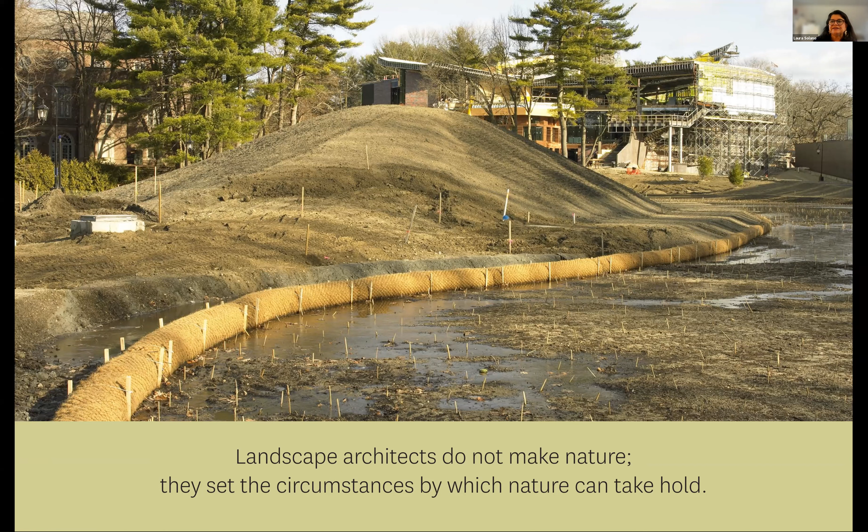First of all, we all need to remind ourselves that we don't make nature, right? Not at all. As I've shown you, we've actually disturbed nature quite a bit. But we do set the circumstances so that nature can take hold, and soil is at the base of that. You love plants, you better love soil, because there is a very deep connection there.

Another thing is that increasingly, landscape architects work on sites that have been industrialized, urbanized, abused, abandoned, contaminated, or previously developed. And you need to bring that to your client's attention, right? You are not walking onto a site that already has a soil resource. You may find a little bit of that, as we did at the Bush Library, and we collected what we could. But we put that material aside and really had to import most of our soil.

So you need to help your clients look at their projects in a different way. You need to understand what their ambitions are as they're doing the project, how they're motivated. And of course, they have much different concerns than you. They're interested in a project that goes well, on budget, on time, and will serve what they intended to do. Because building is not easy, right? The decision to build, period, no matter what side of the table you're on, it's a big move.

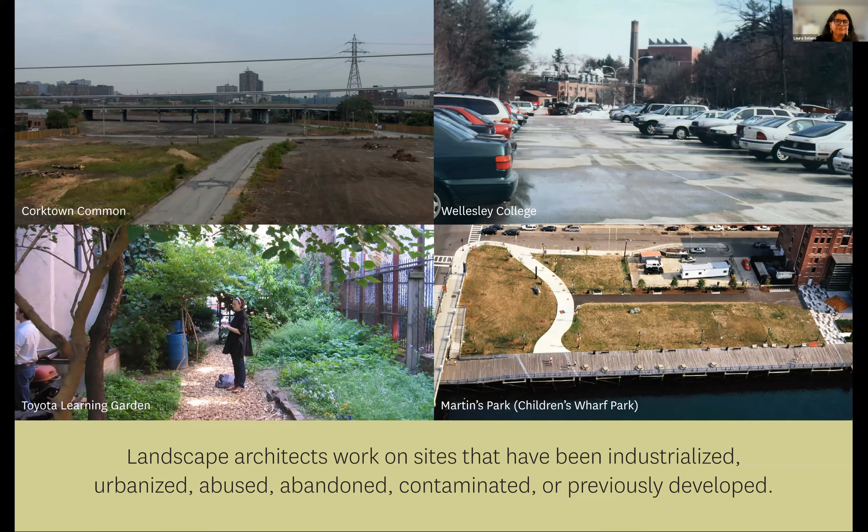Hort soils are also the singular determinant, certainly in all of our projects, for sustained plant health. And healthy landscapes are easier and cheaper to maintain.

It was never our intention at Teardrop to have the ice wall be this kind of brutish, very forceful presence, which it was early on in the site, but rather for it to be something that you discover, that you see from afar, and you're kind of curious about it. So if the plants hadn't grown, we would have lost that really basic idea of Teardrop, which was one of discovery and movement through there.

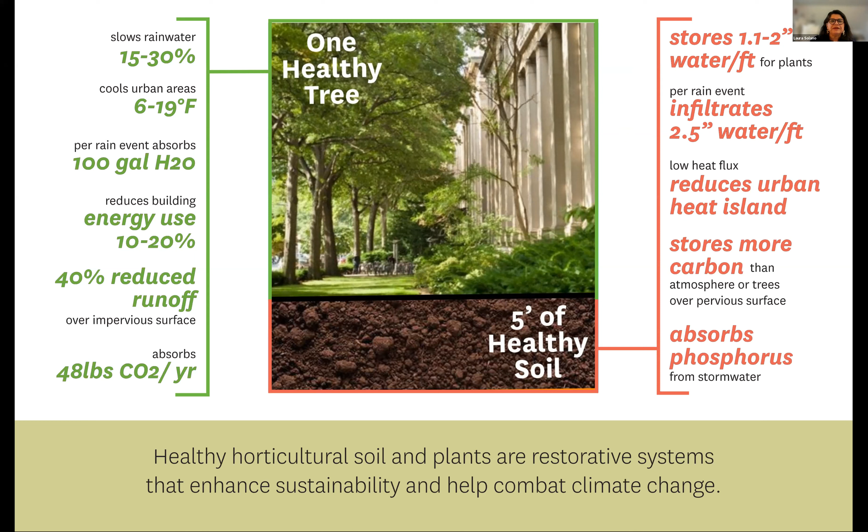You have to match the plants with the soil and the soil with the plants. It sounds so obvious, but people miss it and clients miss it.

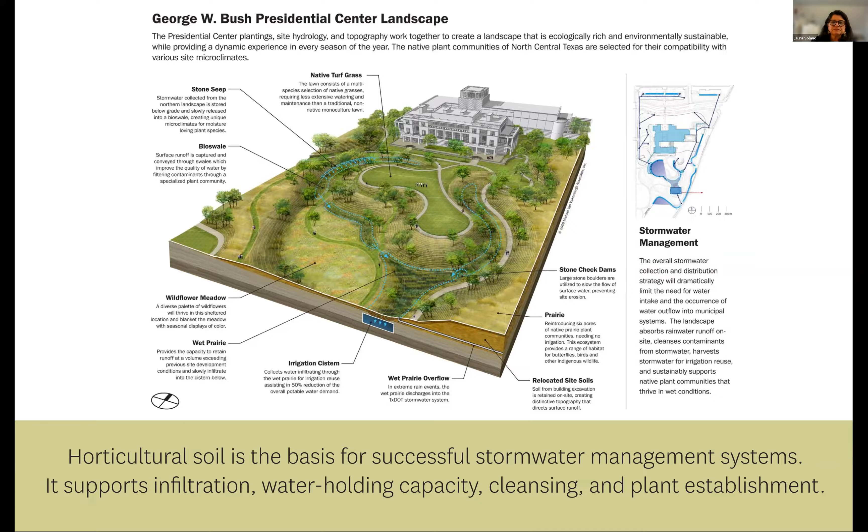And then strange things show up on your projects, right? A request - and this was one that was very late in Teardrop - which was to use gray water from the buildings. Teardrop was supposed to be built before any of the buildings went up, and it actually was built after all the buildings were up, primarily due to 9/11. But so you have a client who wants to use gray water, and that's just such a great ambition, right? And of course you want to accommodate it. They want to use the gray water to irrigate the park.

Well, the problem is that gray water is full of salts due to our diets. It's actually kind of astonishing - Google it and you'll see that I don't even know how we're all alive.

So what do you do? You have to explain to the client, if you want to go forward with this, we have to take care of things, right? So there is a small desalinization system in Teardrop. And in fact, many people don't realize that the Teardrop wall is actually the facade for this utility vault where everything is run from, and the desalinization plant is in there as well. It added about $30,000 to the project at the last minute. Lots of calculations were done - what was the recovery time, what was the message that people and clients were trying to put out. So in the end, we decided to do it.

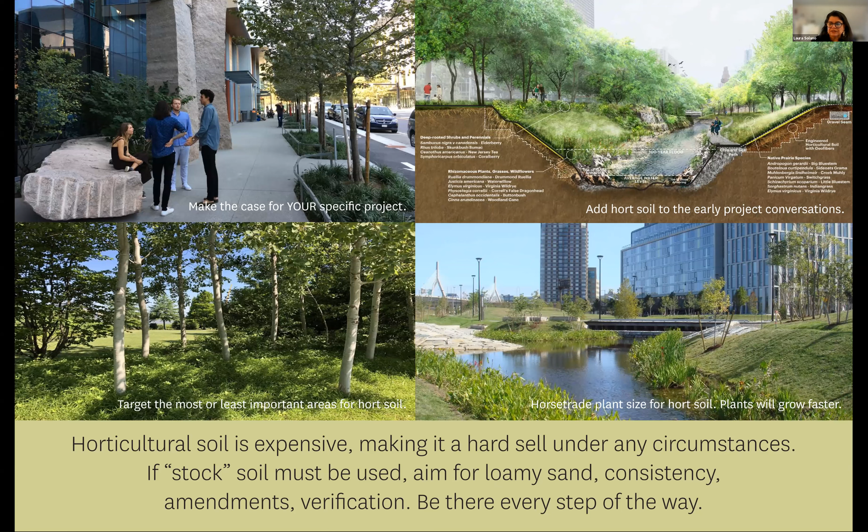One thing we've learned is that a lot of the science and knowledge about horticultural soil comes from agricultural soil. But if you really look at it, the ambitions of agricultural versus horticultural soils are quite different. In agricultural soil, you're trying to grow food and fiber. In a landscape, you are trying to create a botanical experience.

Agriculture has intensive growth; we look for slow growth. The type of materials we use take time to become themselves. Agriculture has a short nutrient demand for that growing season, whereas we need a sustained nutrient supply. Agricultural soil plans for disturbance every single year, even if fields lie fallow - the long-term plan is to be disturbed. We're looking to protect from disturbance.

Agricultural soil, because of the depth of roots of crops, cares about the O and A horizons. We care about the O, A, B, and C horizons because we need it for tree structure and for the entire root mass. Agricultural soil is isolated from public use; ours is engaged with public use. Ag soil has contained natural systems, and we have joined natural systems.

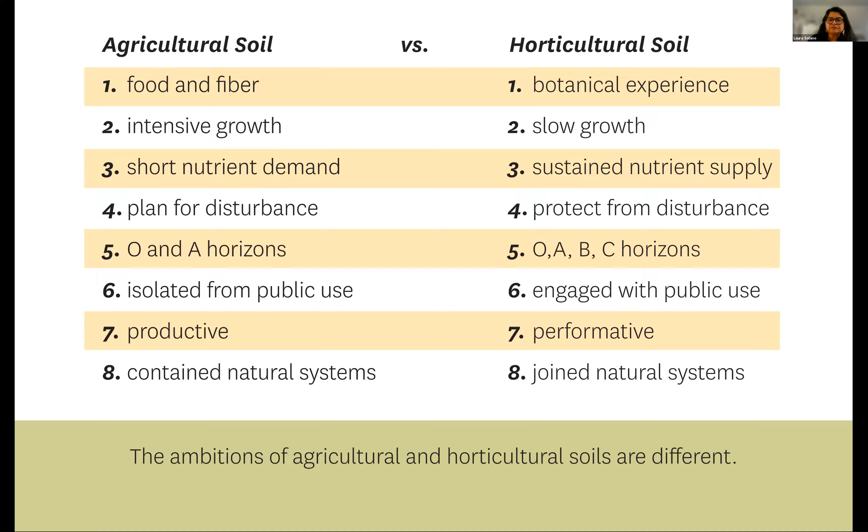The other thing we've learned is that organic matter and clay are really critical to fertility management because their cation exchange capacity, their CEC, enables nutrient cycling.

And here's more soil nerd humor. This is a fellow named Tom Wang. He's a professor at the City College of San Francisco, and there's his website if you want to look him up. He's made cartoons of all these natural processes, not just soil, but he has quite a series on soil, and they're really fun to look at.

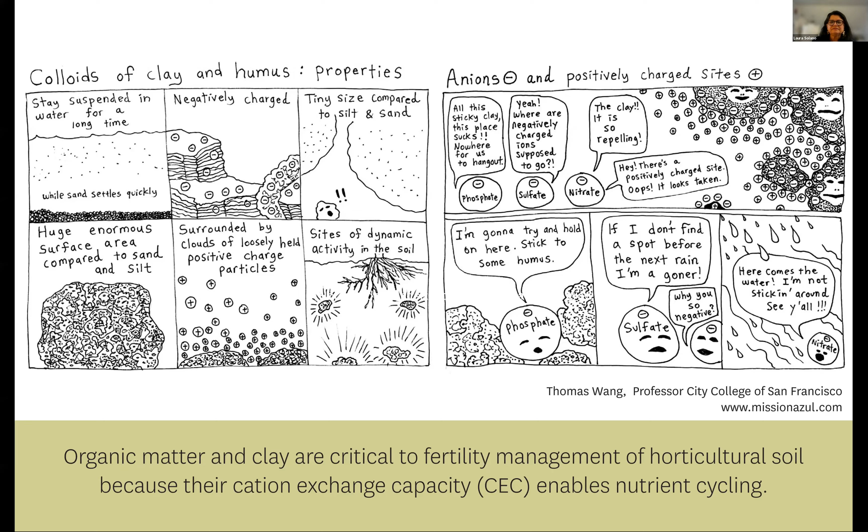The availability of topsoil and compost, and for that matter any kind of organics that you're adding to soil, varies so much across North America. And yet we find ourselves working on projects that are far away from home base.

So what do you do? Well, the first thing you need to do - and you need to do it really early, because it affects cost and quality control later on - is get on the phone, if not your feet, and investigate what the local resources and practices are in the location of your project. There's an important list of things to talk through with soil suppliers in these various locations.

Where do you get your soil from? How do you strip it? How do you stockpile it and then maintain those stockpiles? Do you make a custom horticultural soil mix, or mixes that you basically come up with - sand, organics, topsoil - and that's your mix, the mix of the day?

And also, particularly for compost, what's the processing and timing for turning windrows?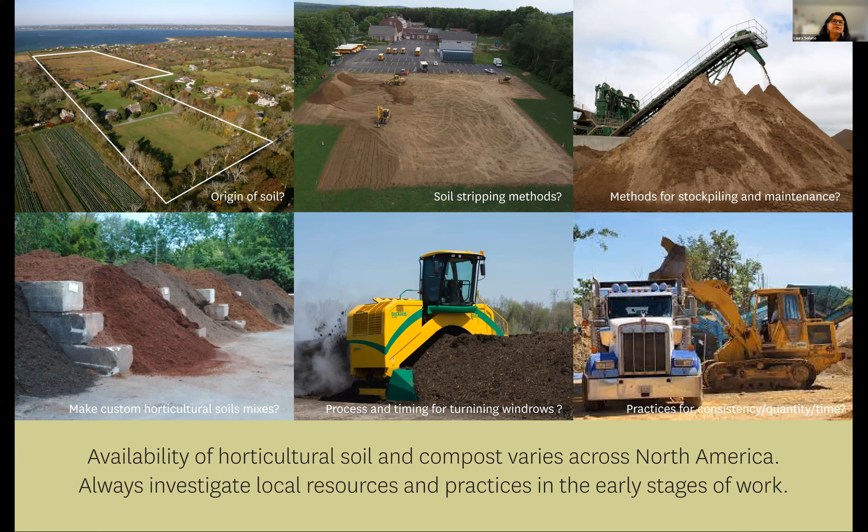But we have evidence from our projects that landscapes that use horticultural soil establish so much more quickly, and they endure minor issues and have sustained growth. This is the Peabody Essex Museum, and the way to orient yourself is with the building in the distance. Again, this wasn't many years, it was 11 years to get a landscape that feels like it's been there for a while. If you gave me a choice to walk in our design on the left-hand side or the right-hand side, I might go around the block on the one on the left-hand side — that kind of scratchy rawness that landscapes have when they're young.

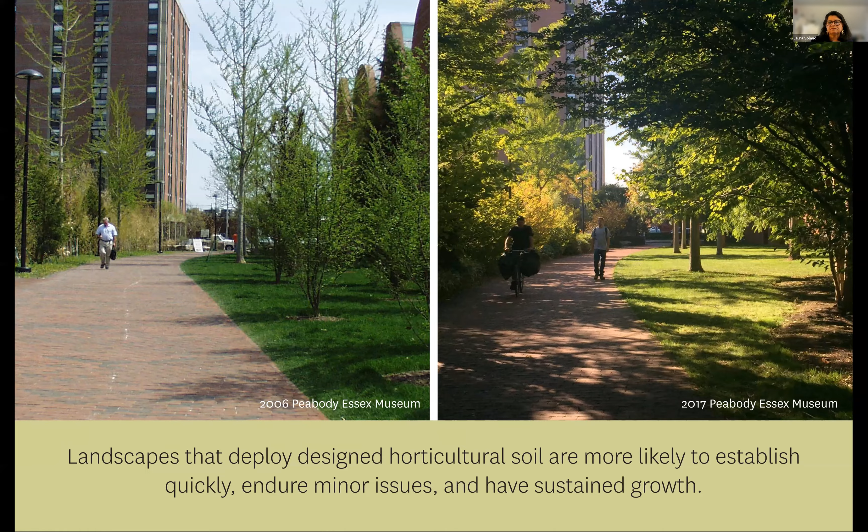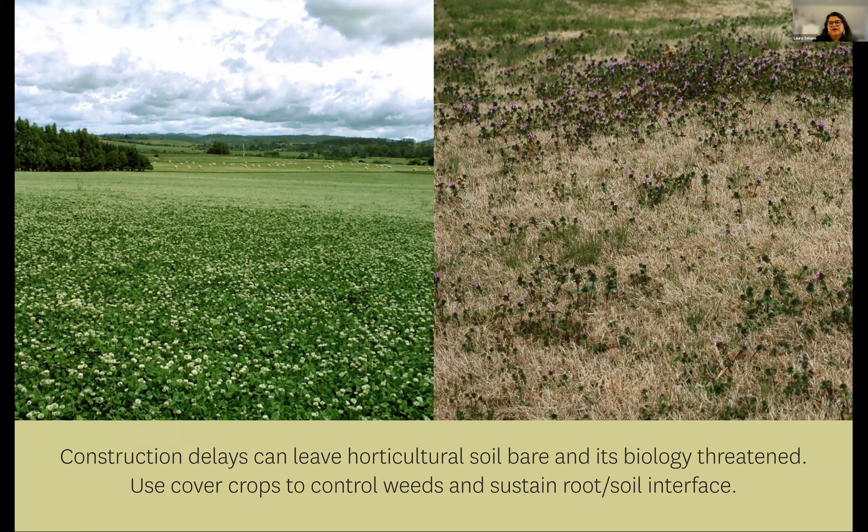We all experience construction delays. So one of the things we've learned is, if horticultural soil is put down and is going to be left bare, the biology in the soil is getting threatened, because that biology, as I showed you before with the rhizosphere, in order for it to kick in and stay kicked in, needs that interface between roots and soil. So we've gotten into the business of using cover crops to control weeds and to sustain that root-soil interface. It's so much cheaper to do this than to go in and remove weeds. How do you do it? Do you turn them over? Do you use chemicals? No, I don't want to use chemicals. In Canada, you can't use Roundup. So a lot of things get taken out of your hands, and you have to find other ways to combat those things in the beginning.

Not every project can have prescribed horticultural soil, and we're facing that on a project in Toronto called the Portlands. This is our site, basically. The project is to renaturalize the Don River, which is right here, because right now these areas around that mouth get horribly flooded. So it's an engineering project, a project we're leading. Our bright idea was to put a river right through this industrial land and to create parks, leave parks behind as part of the flood protection. But guess what? We need...

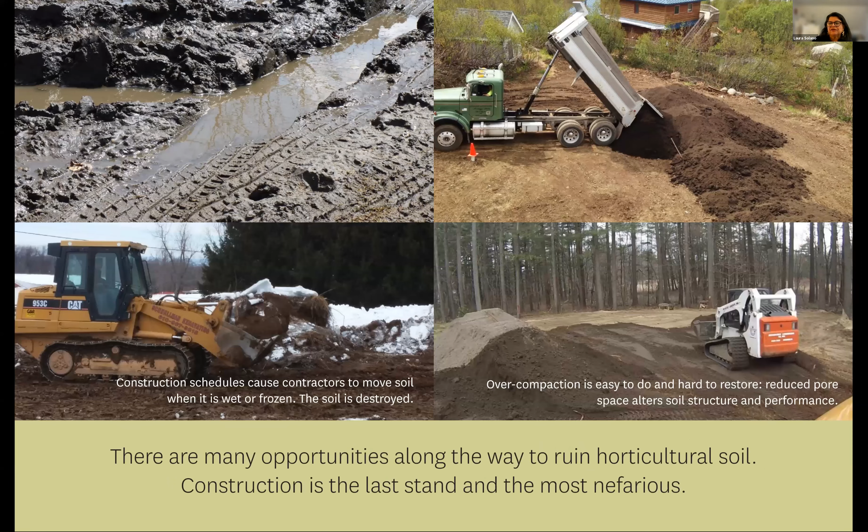Well, first of all, there are so many opportunities along the way to really screw up and ruin horticultural soil—getting the spec wrong, not doing your homework and finding a supply for it ahead of time, not warning your client about how much money it is, not being able to get the quantities that you need.

But the rubber hits the road in construction. It's really the last stand. And you need to have a site presence, because you've got a schedule going, and your client wants things to move, and they couldn't care less that soil gets harmed when it's wet or frozen—but you do, because you know the consequences of doing that.

Likewise, over compaction, just as you're moving things, as you're spreading things, as other contractors want to take your beautiful field of soil and store their materials on it. So you really have to be so proactive.

One of the things that we do to help that is, when we start working with the contractor, really during bidding, we talk a lot about what this soil is and what the expectations are. You go just shy of frightening somebody, because you need them to be your partner. But you've got to get that message. It's almost like you hand the baton at every phase to somebody else with soil.

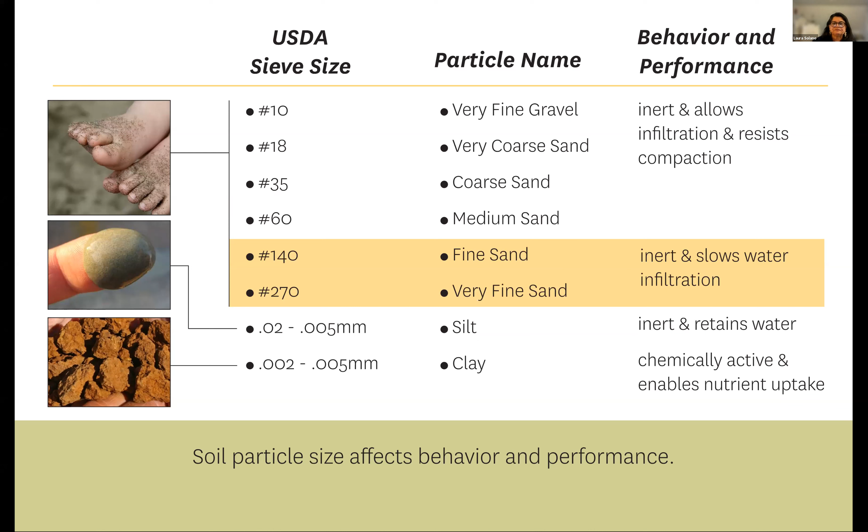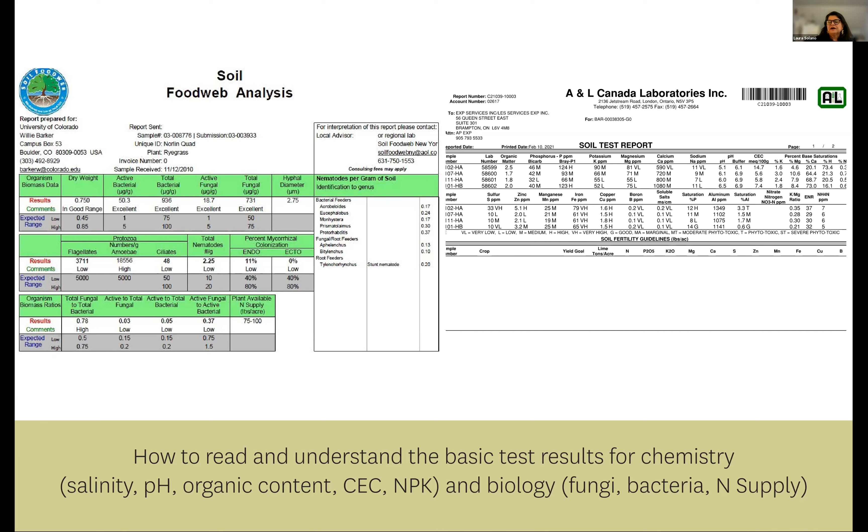Or working with lighting and there has to be a junction box, right? We gather that language pretty regularly so that we can have conversations with engineers and others. It's the same with soil science. You really need to be able to talk it and walk it.

We require lab and field testing, and it's critical for compliance for sure, but it's even better for forensics. And by that, I mean, if something goes wrong, you can go back and look at tests, or you can look at grab samples that were taken and not tested, just to see what's going wrong, if you have something.

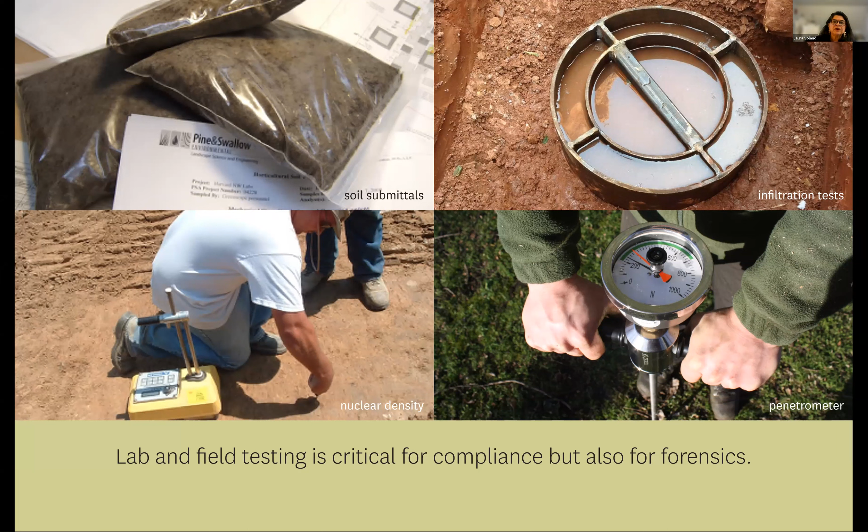But the truth is that we don't get into that situation too often because we're constantly keeping up with what's going on site. But I will say,

despite those at the Leaning Tower of Pisa not having spent their 700 lira wisely, soil testing is costly if you start to get into large volumes of soil. And it's time consuming from the respect that it takes time for the soil to come back.

So what we've learned is, first of all, when we look at a soil, we look at gradation first. We don't even ask for the chemical. If the gradation is wildly off, then the other parts of the tests don't matter. So you're saving money on that.

When you get the gradation right, then you can start to look at the chemistry of the soil as well. We used to test stupidly for soil biology really early, like at the site of soil supply. And what a waste, because soil biology changes over time based upon the plants that it's interacting with, based on the time of year, et cetera.

So what we do is we look at soil biology after the soil is installed and rests for a while so that it can get its wits about it.

And then there's usually a pretty regular testing frequency in construction. But if things are going well and you have confidence that the soil supplier is doing their job and is as invested in it as you are, you can start to relax the frequency of those tests, so that all of those are geared towards helping to save money and time. Because I always tell my staff, yeah, it's great to ask for all those submittals, and then we have to actually review all those submittals. So be careful what you ask for.